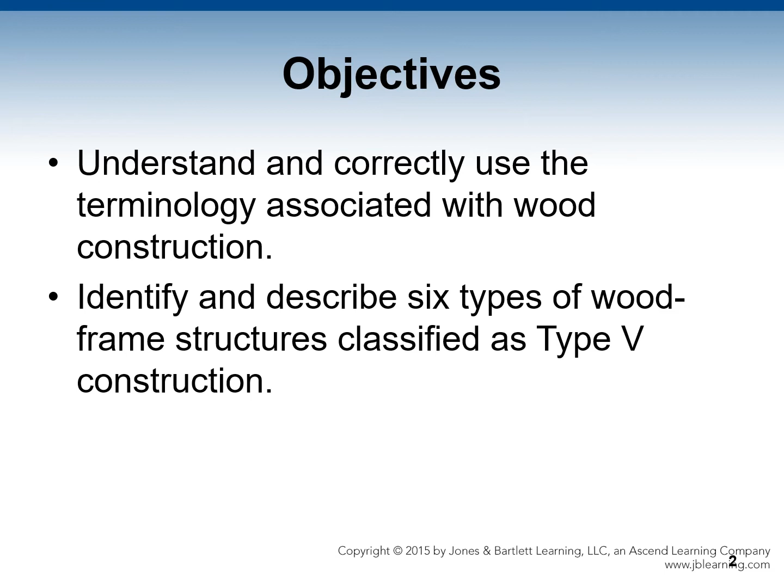The objectives we're going to cover in this chapter are: we will understand and correctly use the terminology associated with wood construction, identify and describe 6 types of wood frame structures classified as Type 5 construction. We will also identify and describe the specific fire protection differences between balloon frame and platform frame construction, and describe the construction of platform frame buildings. Finally, we will understand how a truss is constructed and how it performs from a fire protection perspective, and explain the difference between fire stopping and draft stopping.

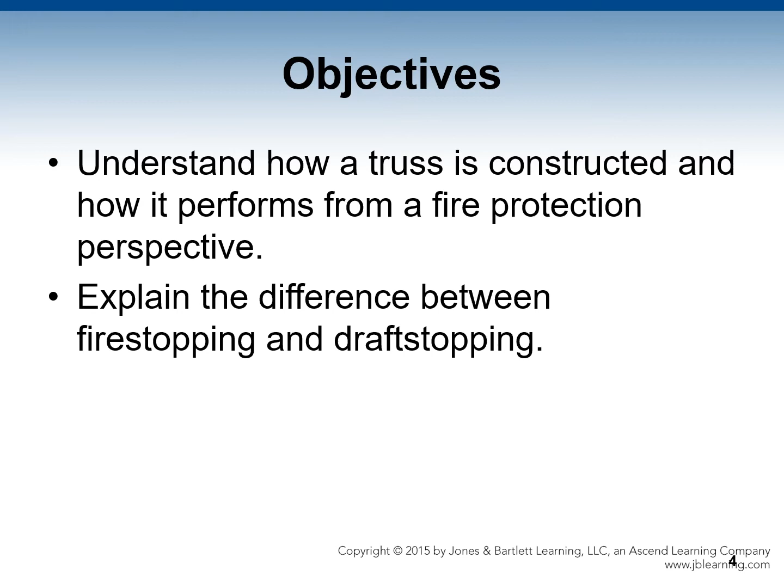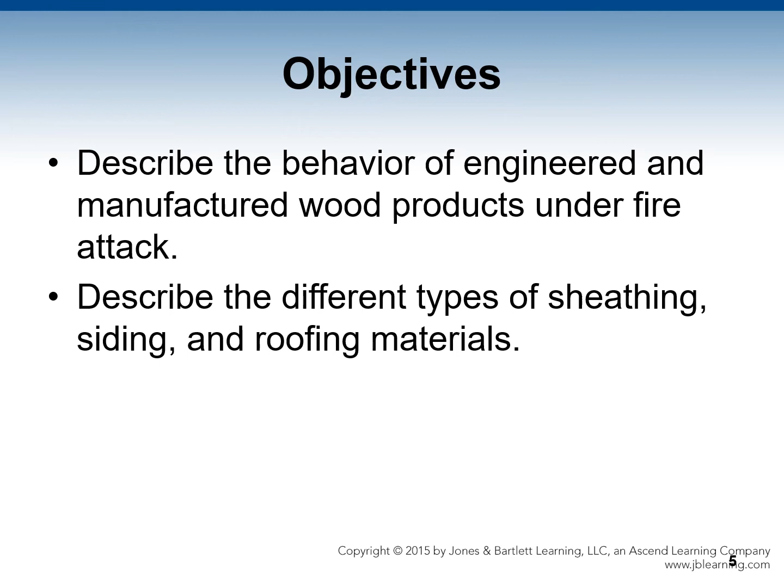We will also describe the behavior of engineered and manufactured wood products under fire attack, as well as describe the different types of sheathing, siding, and roofing materials.

Most fires are fought on, in, or under wood. Wood is combustible, of course. Wood construction creates a combustible void, and wood can have a very rapid flame spread.

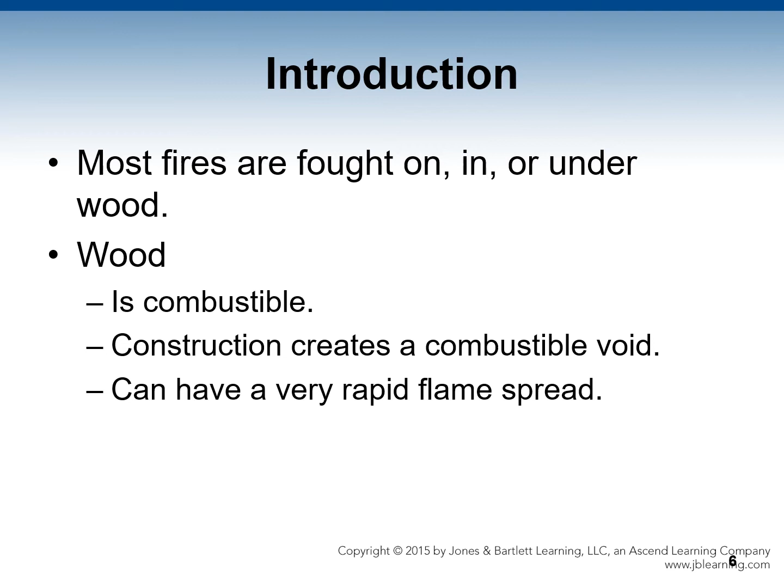Wall bearing means it's a structure where the entire structural load is carried on the walls. A wood walled building means a wall bearing building that carries the load of the structure and contents. An example of that would be a log cabin, for instance.

Let's talk about some terminology. This is wood frame terminology, and the first is a chamfer, which is to cut off the corners of timber to retard ignition. End match lumber is with tongues and grooves at the end.

Engineered wood typically refers to laminated timbers, or wood modified from its natural state. In other words, wood that's been bent into a curve, for instance. Glued or laminated timbers are planks glued together to form a solid timber.

Heavy timber is lumber that is 8 inches or more in its smallest dimension. Joists are floor beams. Legacy construction is the use of solid wood members as opposed to lightweight wood trusses and wooden joists or wooden I-joists.

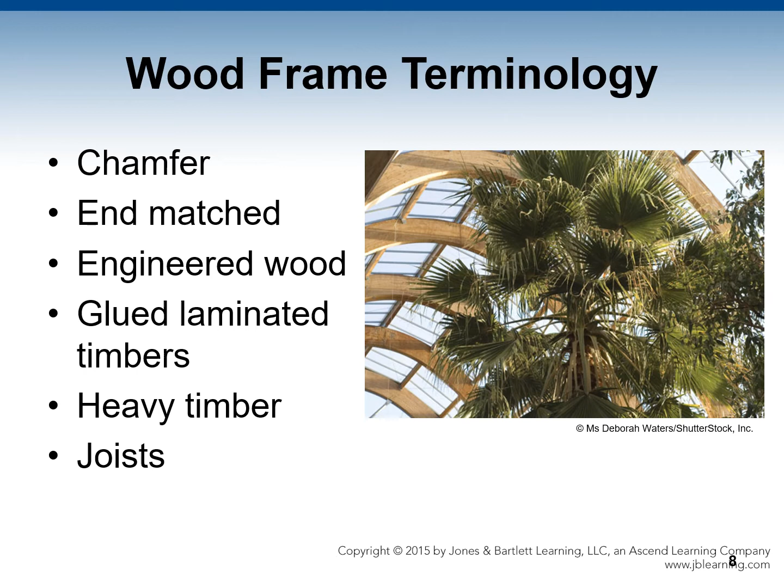Some more terminology. Lumber is wood that has been sawed and planed. Matched lumber is tongue and groove lumber, usually lengthwise, like you would find in an older wood floor where it's tongued and grooved.

Oriented strand board, or OSB, is made of layers of strands of wood cut from logs with a fairly constant width to length ratio. Plywood is layers of wood veneer laid in different directions, glued together under pressure.

Rough lumber is lumber that is left as sawn on all 4 sides. Splines are wooden strips that are fit into grooves in 2 adjacent planks to make a tight floor. Studs are columns in frame buildings.

Wood is the hard fibrous material forming the major parts of trees, of course, and wood lath is the narrow, rough strips of wood nailed to studs. An example of that is what you see here in this picture.

That's wood lath construction. The white stuff you see coming through is called French plaster, and that's on the other side. What you're seeing is wood lath construction with the plaster oozed through the planks that are nailed to the studs.

This is very common in houses from pre-World War II and a few right after World War II, but there are an awful lot of houses that were built during that age and before.

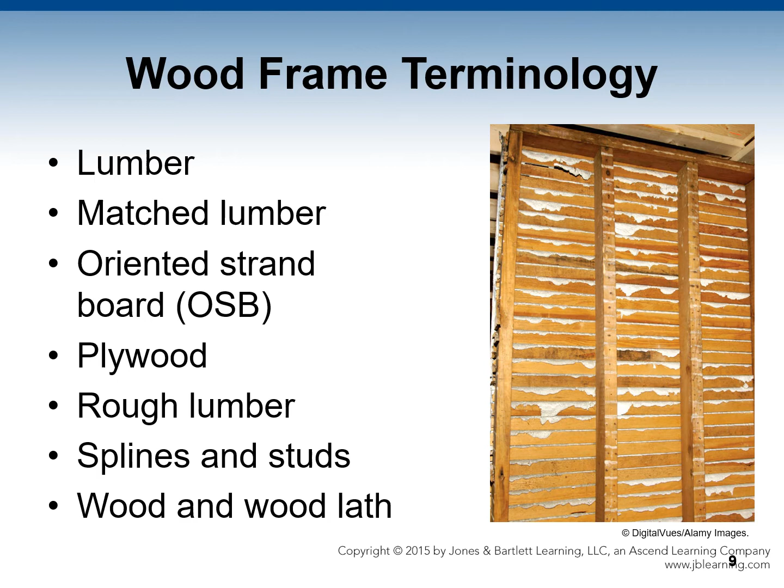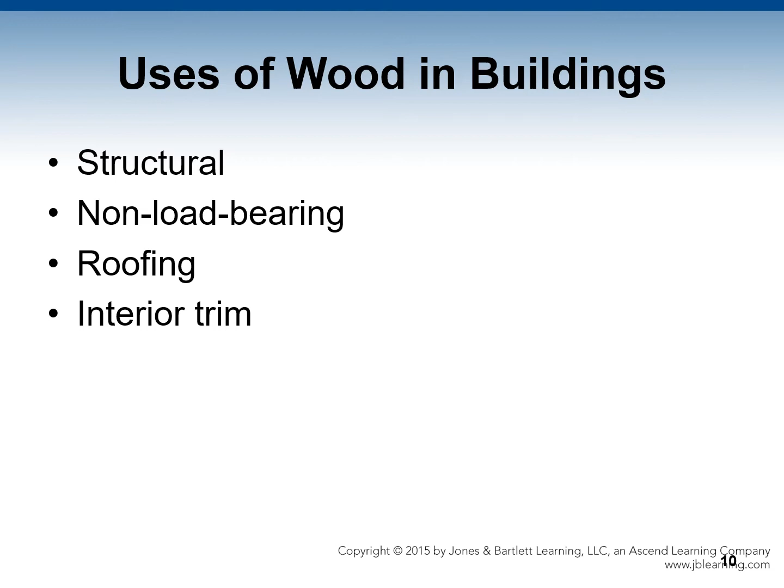Uses of wood buildings: there are a lot of them, and many of them are structural, carrying the building loads. Non-bearing wood, which is wood lath for carrying plaster, or wood wainscoting like the picture you saw in the previous slide, is used for roofing and also interior trim.

Let's talk about types of wood frame buildings. We have log cabin, post and frame, balloon frame, which is sometimes called Eastern framing, platform frame, which is sometimes called Western framing, plank and beam, and truss frame.

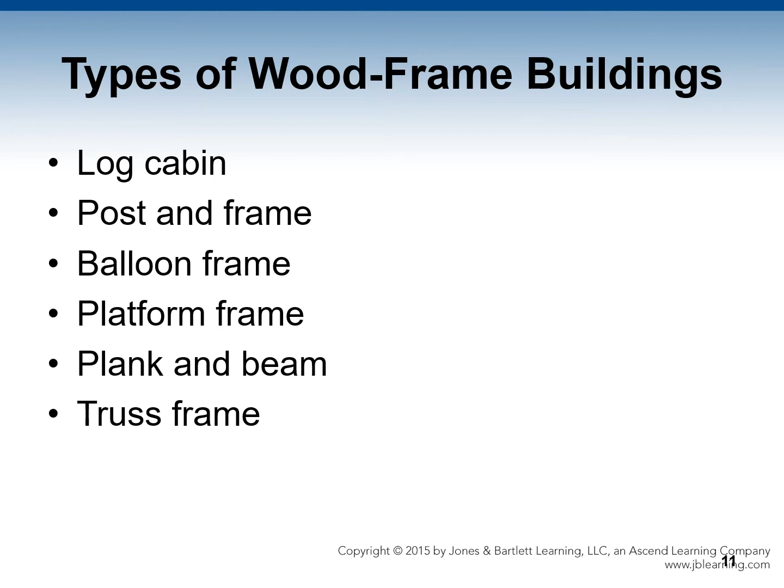Let's talk about log cabins first. These are constructed of entire tree trunks as opposed to boards sawn from trees. Many older buildings, even multi-story buildings, are concealed log cabins. Many carry unexpectedly heavy loads, and they are coming back into fashion. Interior surfaces of log cabins might be boards or plywood, although sometimes they're left unfinished.

Now let's talk about post and frame. This has an identifiable frame or skeleton of timber fitted together, with mortise and tenon, socket and tongue construction, fitted together to transfer loads. And then let's talk about trunnels - this is a New England term for a tree nail.

Post and frame buildings are framed buildings, and the walls are not structural or load-bearing. It's a deceptive imitation of post and frame. Balloon frame houses are a deceptive kind of imitation post and frame, built with exterior finish to resemble post and frame construction. They're also called English Tudor style homes.

Other types of construction are decorated to resemble post and frame style. Now you have to bear in mind, in the western United States here where we're studying, we really don't see this kind of construction, but back east there is a tremendous amount of this kind of construction. So bear in mind, if you move back east, you're likely to encounter this.

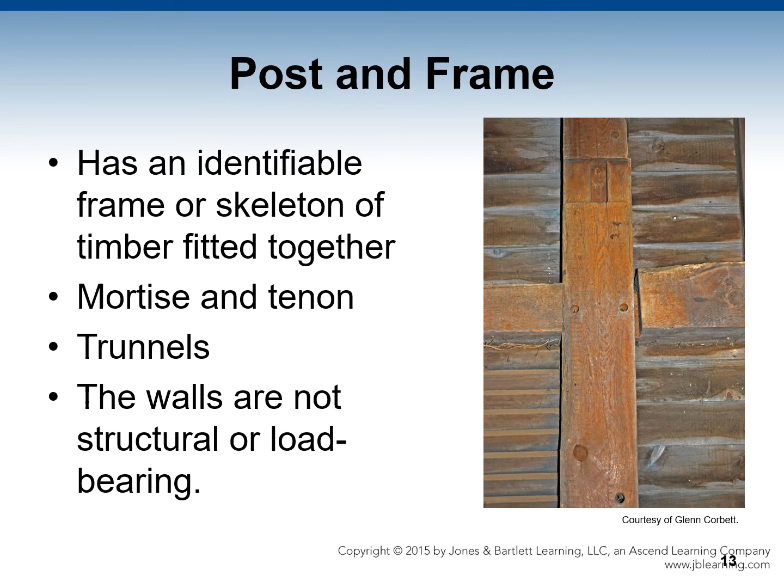Now let's talk about balloon frame. The background of this is its walls of ordinary studs nailed together, an almost universal construction method for multi-story wooden buildings until the middle of the 20th century. The fire danger is that fire can spread through all interconnected spaces from cellar to attic and across the ceiling. Interconnected voids can be considered to be one big balloon.

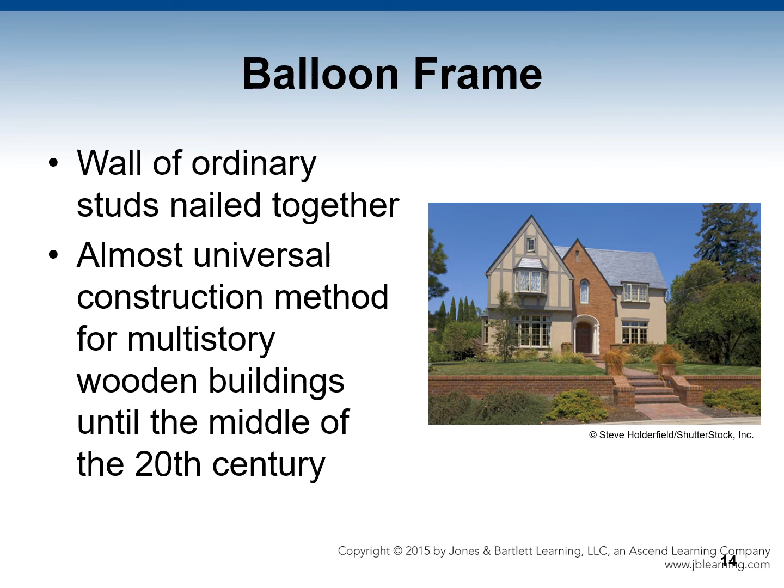Installing fire stopping in an old building is very costly, so most houses don't have it. Unfortunately, balloon frame is coming back into style, so this is something you definitely need to be aware of also.

Let's talk about fires in balloon frame buildings. Fire found in the walls can quickly cross the building through joist channels. Use of a plumbing torch to braze a copper tube or thaw out a pipe can often be a culprit.

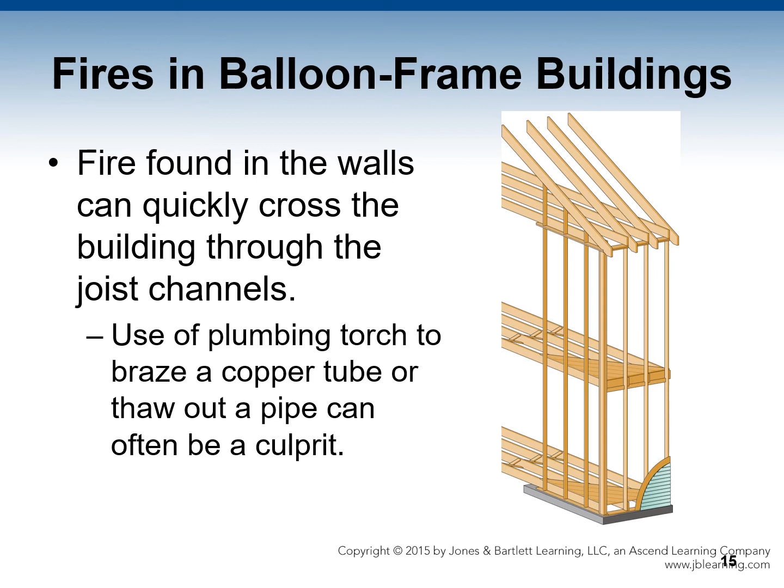The basement is usually the worst place for a fire to start. Firefighters need to anticipate the spread. Extension sector is an officer whose function is to observe the building on all sides, watching for signs of fire spread. Vermiculite is a sand-like material that acts as a fire stop that has been added to some buildings that are balloon frame construction.

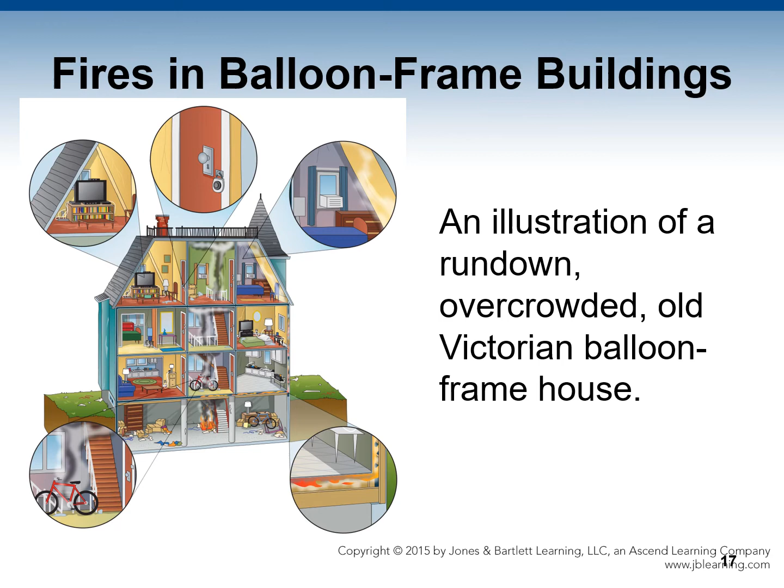This is an example of fires in a balloon frame building. It's an illustration of how a rundown, overcrowded, old Victorian balloon frame style house will literally go up like a box of matches.

Let's talk about platform frame. This is defined where the first floor is built as a platform. The subflooring is laid on the joists, and the frame for the first floor walls is erected on the first floor. There's no continuity from top to bottom.

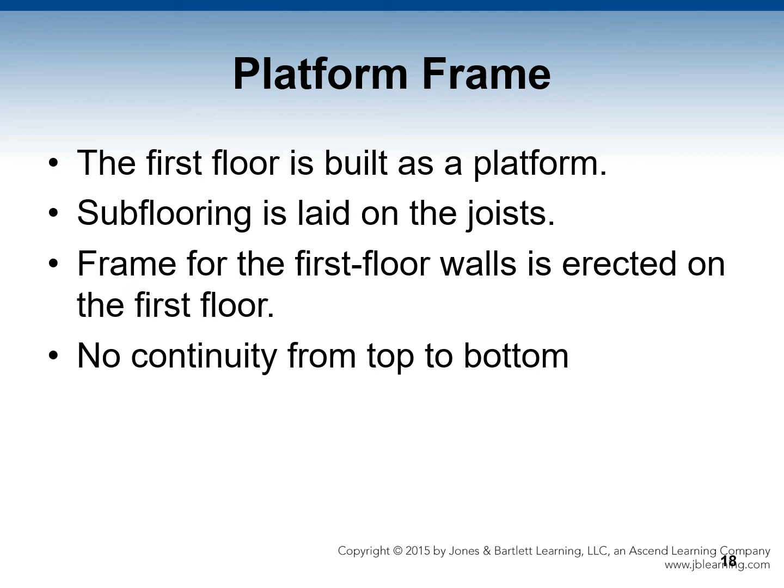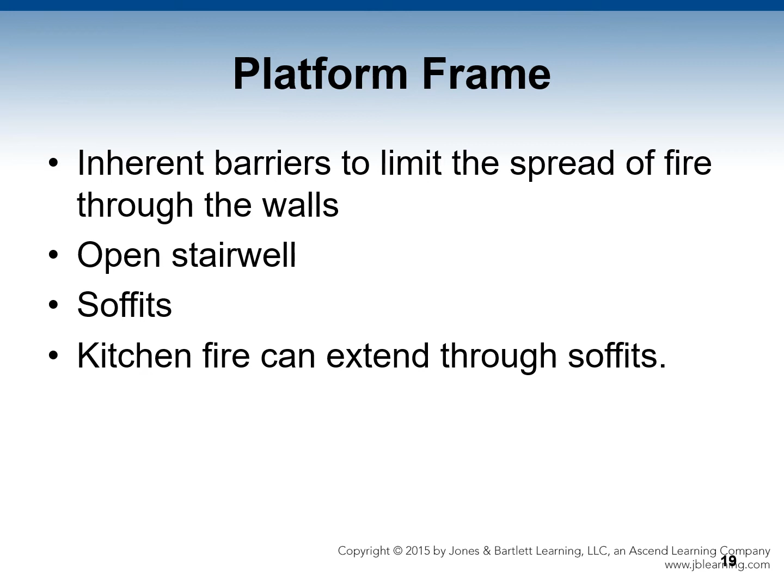In a platform frame house, there are inherent barriers to limit the spread of fire through the walls. An open stairwell is the quickest way for smoke and heat to rise to the top of the home. Soffits are false spaces above built-in cabinets that provide a connection, generally without a fire stop, between walls and joist spaces. A kitchen fire can easily spread through soffits.

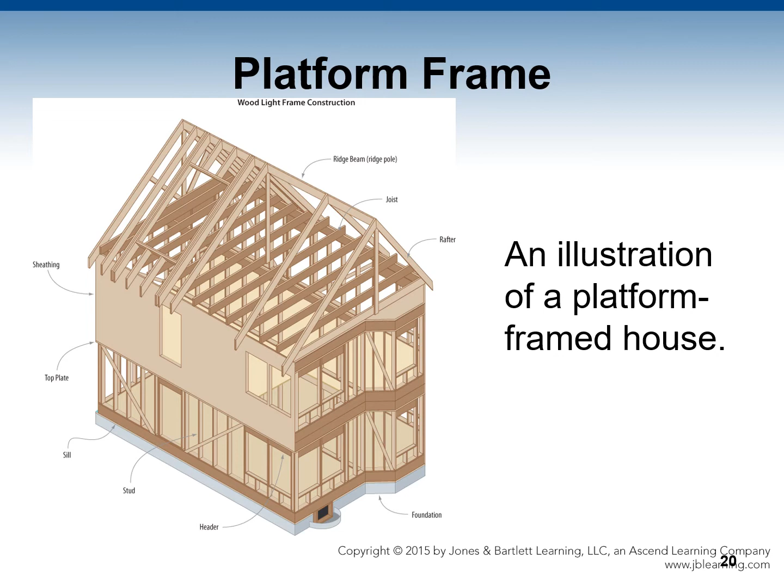Now let's talk about construction of a platform frame building. It consists of rough carpentry that includes all of the wood framing members and sheathing of a building. A sill is found on the platform of the frame of a wood structure. Subflooring is laid on top of the joists, and it serves as the base for the finished floor. Bridging or cross bracing helps share the loading placed on the floor.

The header or bond course is the bricks laid so that the end is visible. A trimmer is a piece of lumber that supports a header and can be found in floor openings such as stairwells, and they run parallel to floor joists.

Continuing with platform frame building, the bottom plate is laid on the subfloor where the vertical studs are installed. Top plate is the top horizontal member of a wood frame wall that supports the ceiling joist. Rafters are wood members used to support the roof sheathing and loads. Ridge boards are placed on the ridge of the roof onto which the upper ends of the rafters are fastened.

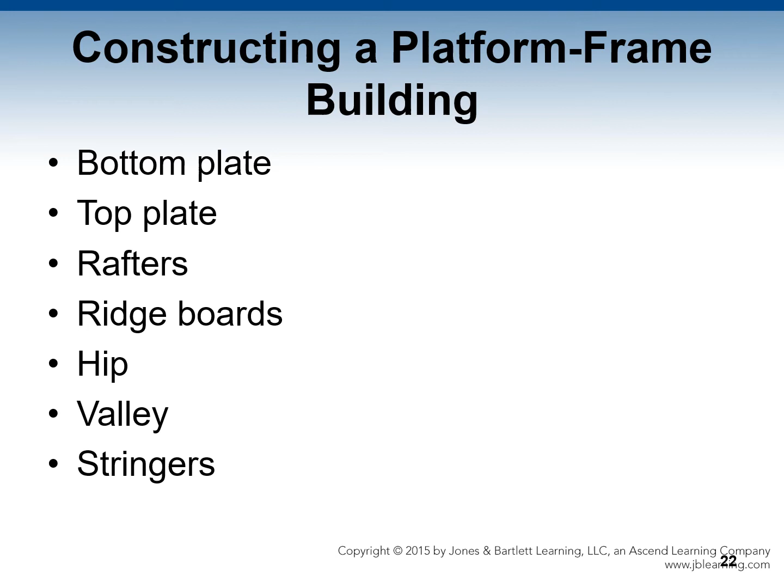Hip is the rafter at the angle where two sloping roofs or sides of a roof meet. The valley is the lower slope formed by the connection of two inclined planes of a roof. Stringers are a component of a set of stairs used to support risers and treads.

Now let's discuss plank and beam construction. This is used in modern construction. It's built with heavier beams spaced much farther apart than the traditional 16 inches. They consist of thick, finished tongue and groove planks used for flooring, and this helps reduce the volume of concealed space in which fire can burn, shielded from hose streams.

The interior finishes often have high flame spread and smoke developing characteristics. In many cases, rooms are all one large open area, like the great room, kitchen, and dining room - there are no separate walls for them. They're just one large area.

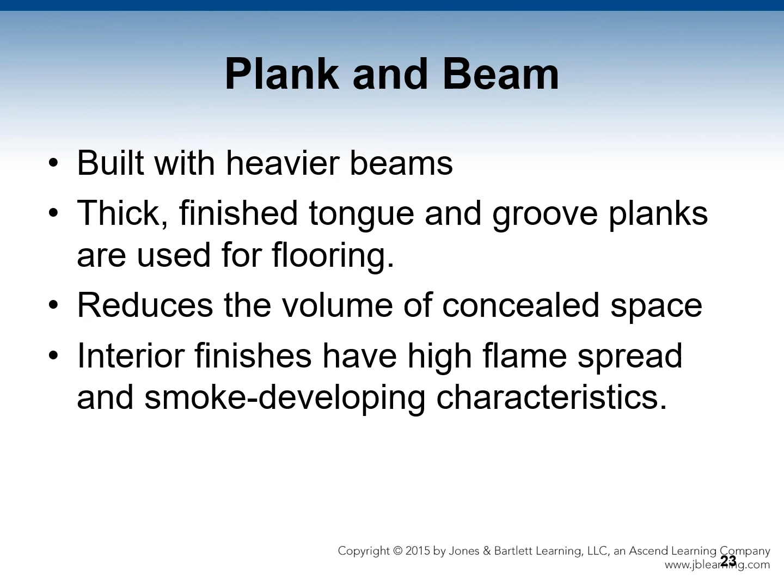Continuing with plank and beam: fire in high open spaces can spread rapidly and develop into a huge volume. Intermediate structures should be sprinklered or of non-combustible construction. Unfortunately, they aren't all built that way.

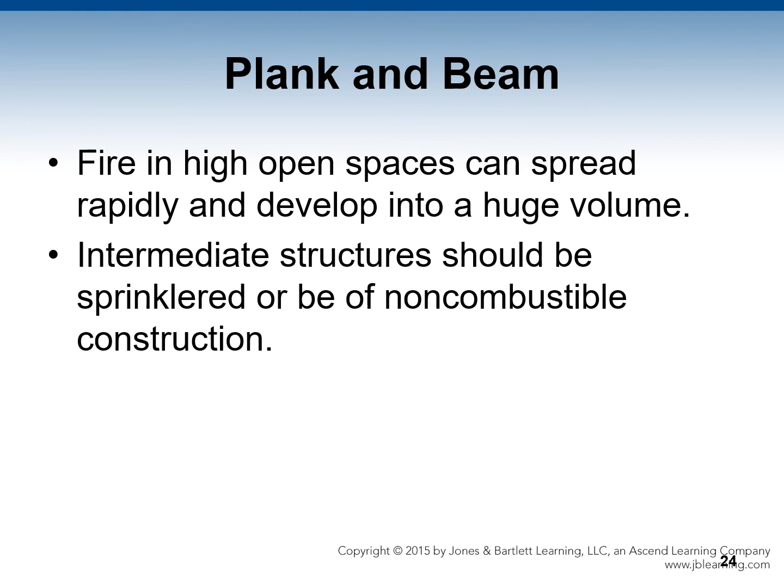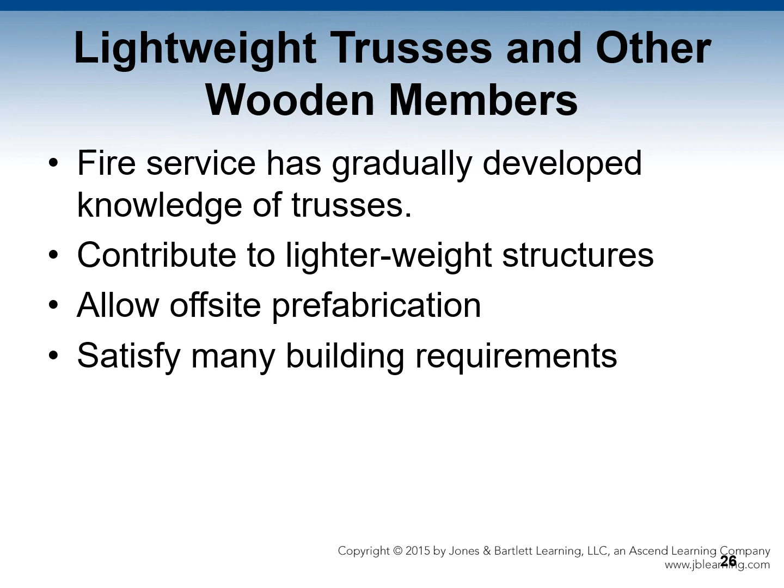Now let's talk about lightweight trusses and other wooden members in construction. Knowledge has developed gradually in the fire service regarding these. They contribute to lighter weight structures, allow off-site prefabrication, and satisfy many building requirements.

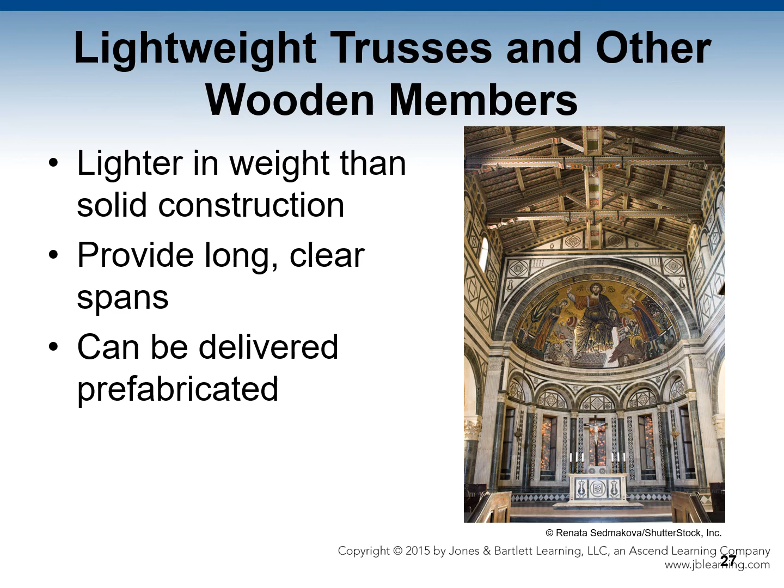They are lighter in weight than solid construction. They provide long, clear spans and can be delivered prefabricated. Lightweight wood trusses have been in general use since the 1960s and are joined together with steel gusset plates called gang nails.

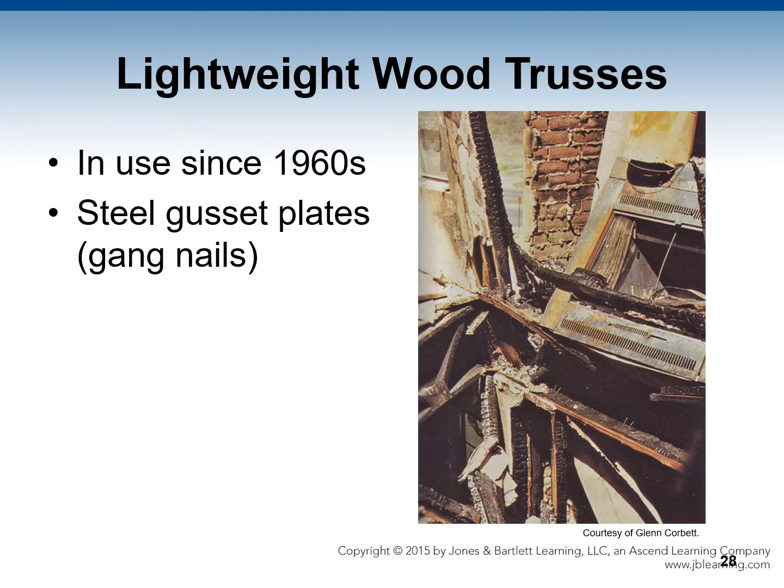Finger joints are interlocking wood pieces glued together to create a longer piece of dimensional lumber. This is used when you can't find, for example, a 30-foot piece of lumber for a truss - you'll see this type of construction to create a longer piece of dimensional lumber when a single piece isn't available.

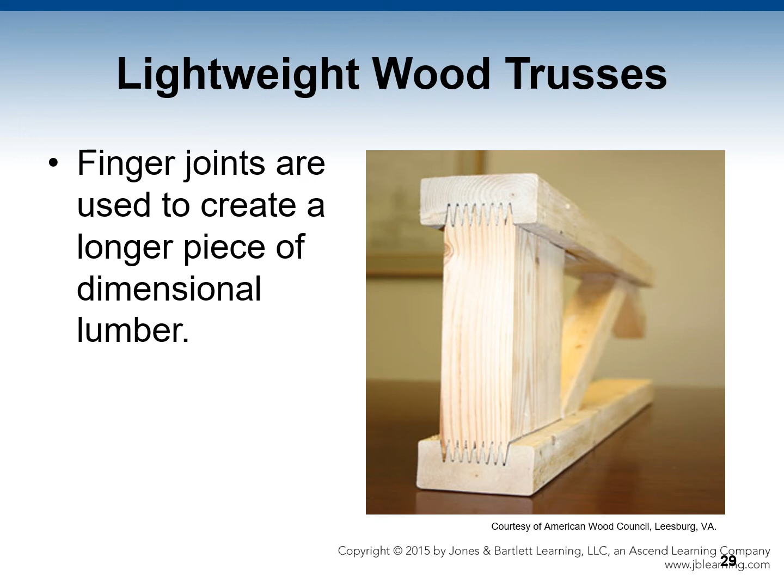The dangers of wood truss floors: these are a hazard to firefighters. They have a high surface to mass ratio, and heating of the gusset plate will decompose tensioned wood fibers holding the teeth. There are no outward indications of truss building presence, and it may be disclosed by smoke or fire pushing through the wall or the floor line.

Some more dangers of lightweight wood trusses - you can see here in the picture where they're placing one into place. They're equally hazardous as wood truss floors. They lack a single ridge pole to help support a firefighting roof ladder. Exposed roofs can fall over in a windstorm. Ventilation must be done with an aerial device, and you can expect a roof collapse during a fire in a roof made of this type of construction.

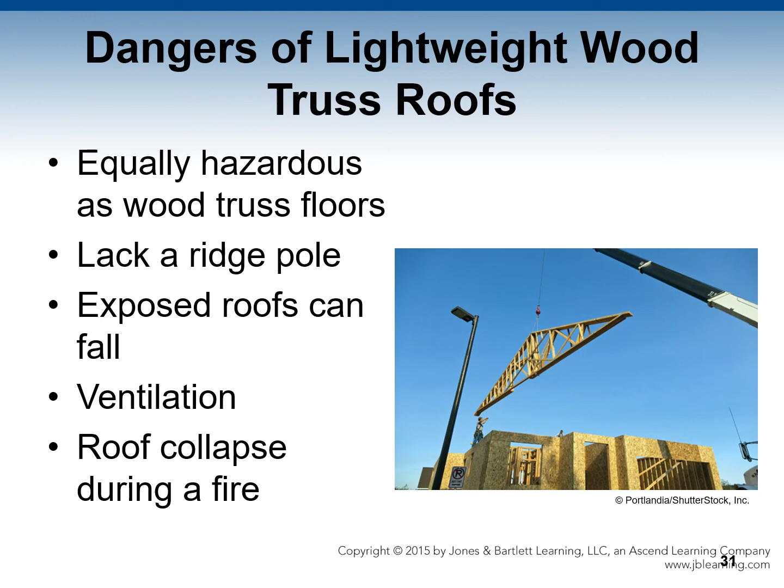Now let's talk about the truss void. This is found within a truss roof system, and this void space is between the top floor of the ceiling and the roof. It represents a large area in which explosive carbon monoxide can accumulate. Voids are interconnected horizontally and vertically.

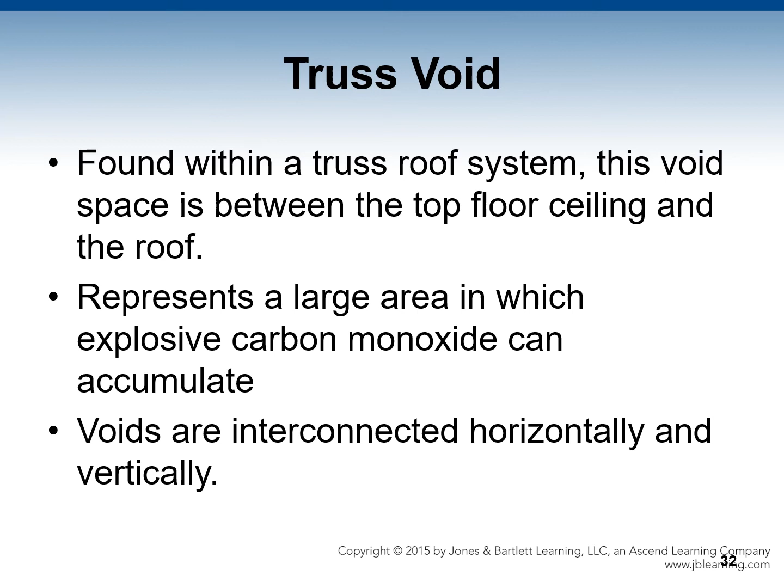The National Fire Protection Association NFPA Fire Protection Handbook provides information on carbon monoxide. A rule of thumb: any exposure in which the product of concentration in parts per million times duration in minutes equals 33,000 means that it's likely to be dangerous. The flammability range of carbon monoxide is from 12.5 all the way up to 74% - it's a pretty high concentration.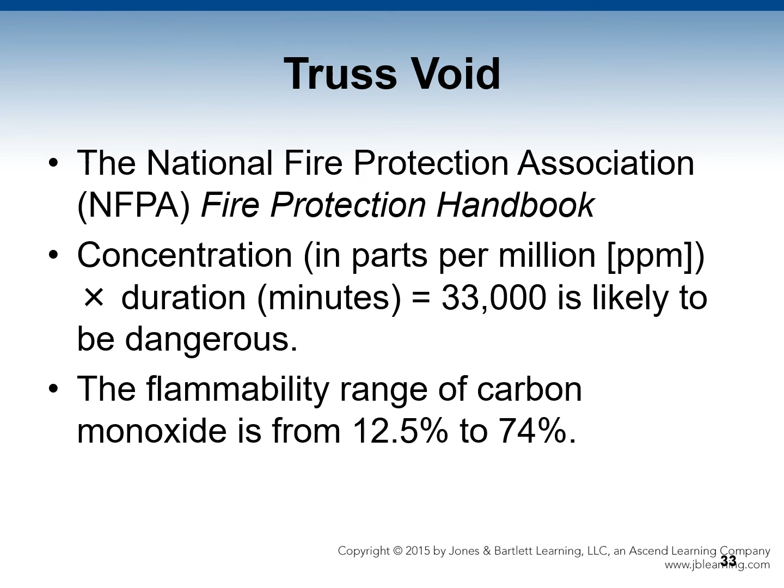Catastrophe potential: you have the possibility of lateral expansion because trusses support the balcony that is the only exit for occupants and the only access point for the fire department.

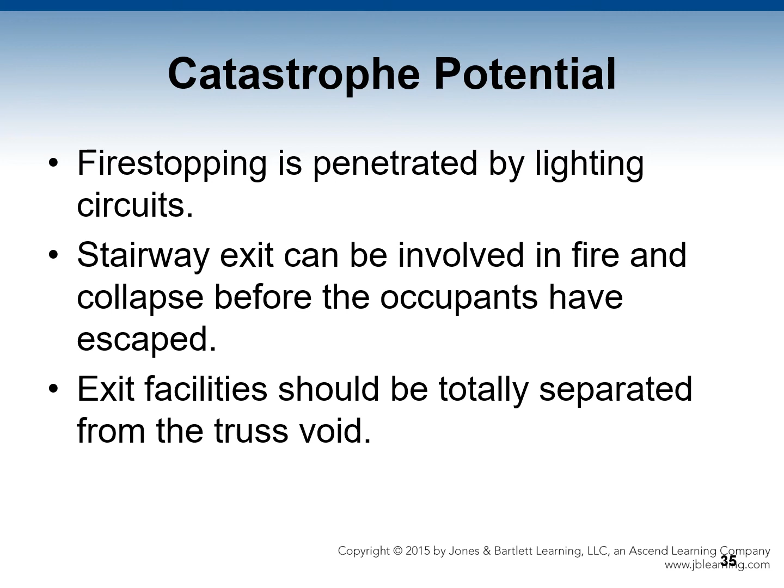Fire stopping is penetrated by lighting circuits. Stairway exits can be involved in fire and collapse before occupants have escaped, and exit facilities should be totally separated from the truss void itself. Unfortunately, contractors don't always build them this way.

Now let's talk about automatic sprinklers and truss voids. NFPA 13R is the standard for the installation of sprinkler systems in low-rise residential occupancies. It's intended to prevent flashovers and save lives. Partial systems should not be expected to provide the fire suppression or control that a full sprinkler system would have provided - so some houses only have partial sprinkler systems. Fires in relatively new 13R protected condos and older 13R sprinkler dwellings have those types of limited systems.

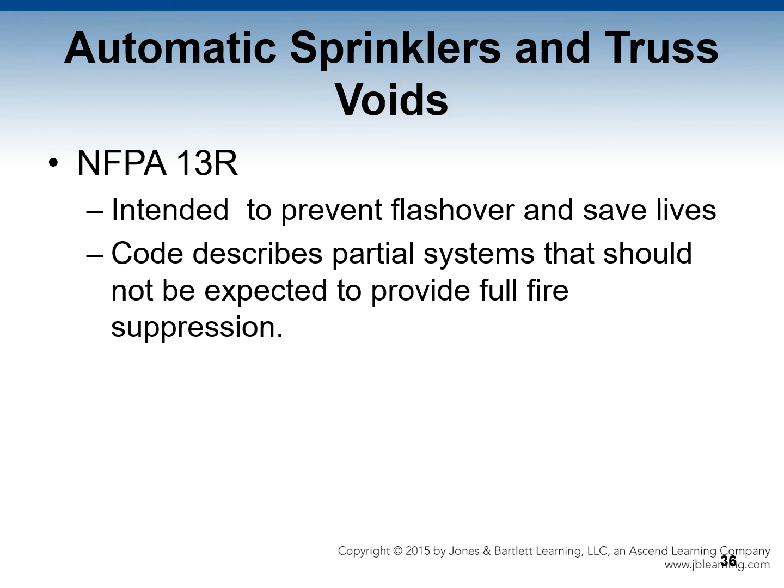Now let's talk about lightweight wooden I-beams. This is a wooden beam - it's inefficient in terms of weight and cost. A sawn beam is replaced by wooden I-beams. A steel I-beam can be used, and steel is extruded through a die. The top flange and bottom flange are wide to cope with compressive and tensile loads.

Then you have sawed wooden beams, and these can be thought of as containing an I-beam with surplus wood along the sides. Firefighters stand and operate on the surplus wood on a burning structure. Gradual sagging is a warning of impending collapse.

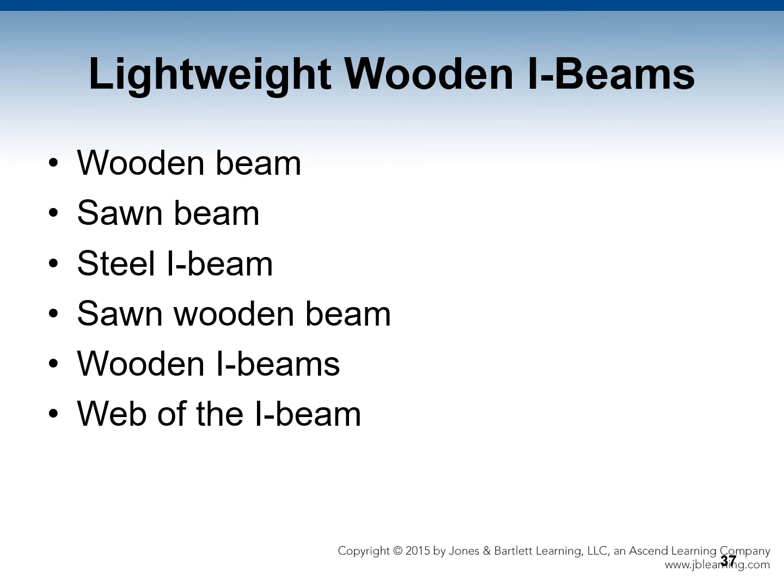With wooden I-beams, they consist of a solid or laminated 2x4 for the top and bottom chords, the OSB or plywood web between the chords. The web of the I-beam is often penetrated by utilities and is an early failure point in fires. Wooden I-joists can be considered the most dangerous of all structural members to firefighters today.

Now let's talk about the truss frame. The roof and floor trusses and studs are tied into a unitized frame. The small dimension lumber will burn faster than larger solid lumber, and unsupported spans in truss structures are subject to total collapse.

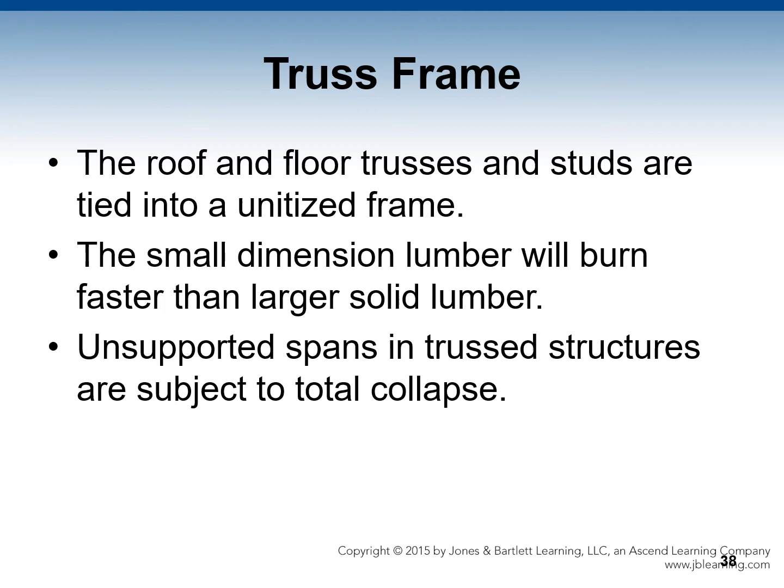The loss of a stud due to a fire could precipitate the collapse of the integral roof or floor truss. Truss frame structures are planar structural components. Design assumes that every truss member will remain in its designed position under load, which without fire, it certainly does. But with fire, all bets are off.

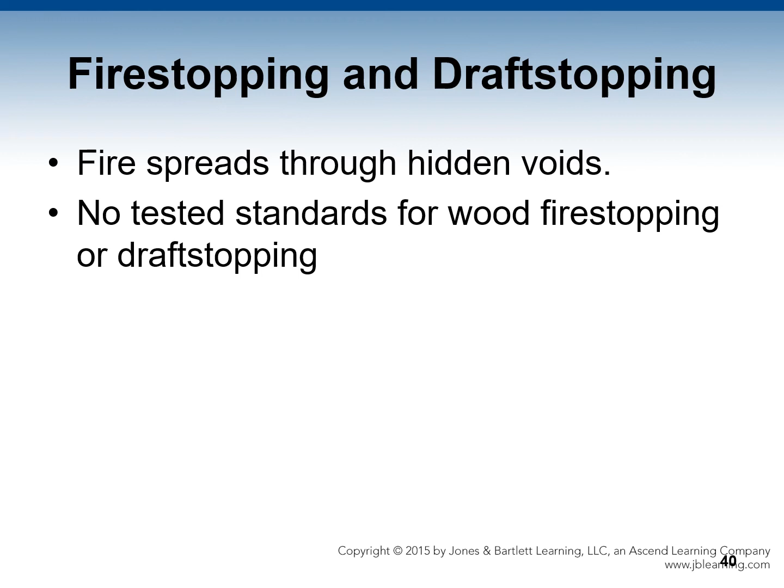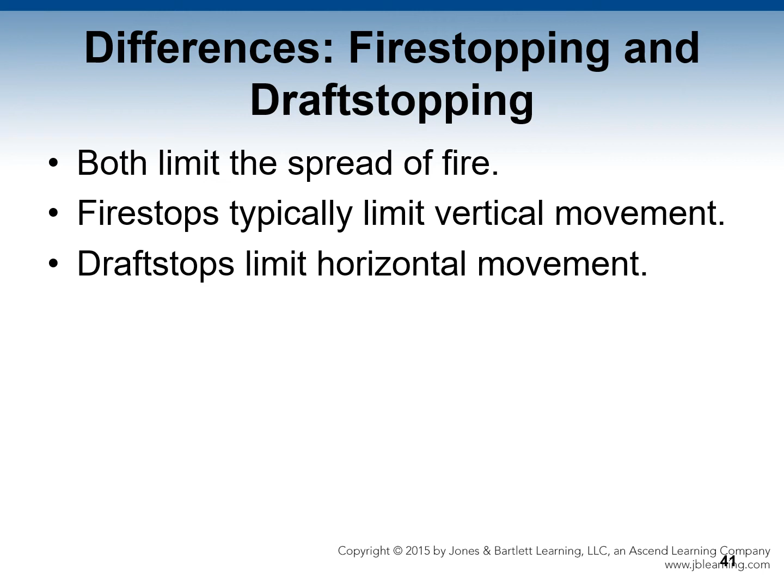Let's talk about fire stopping and draft stopping. Some problems: fire spreads through hidden voids, and there are no tested standards for wood fire stopping or draft stopping. The difference between fire stopping and draft stopping means that both limit the spread of fire. Fire stops typically limit vertical movement, and draft stops limit horizontal movement.

Continuing with types of fire stopping, inherent fire stopping comes as a result of the normal building construction that's incidental to necessary structural purposes. Legal fire stopping is to meet the requirements of a code.

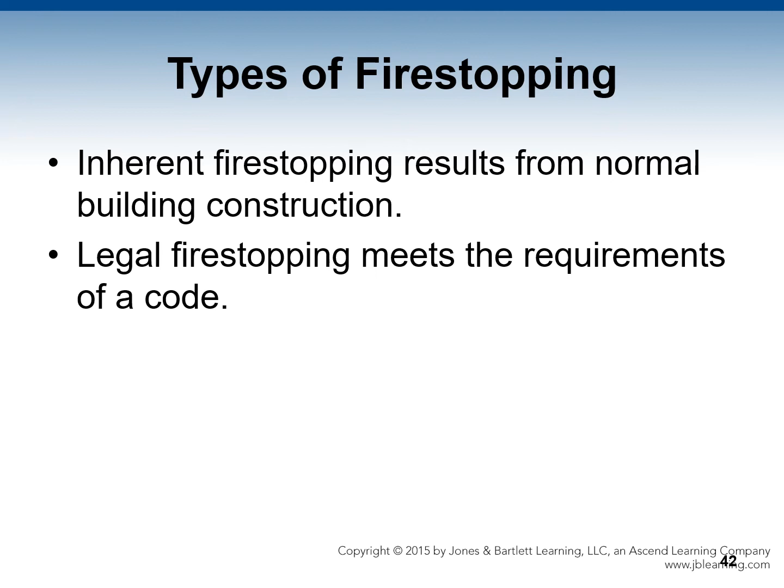The effectiveness of fire stopping: the lack of fire stopping in one stud channel is sufficient to transmit fire. In older houses, all four sides of the chimney-like stud channels are combustible. A lack of fire stopping is particularly critical in balloon frame buildings. In fact, it's critical in balloon frame buildings.

Not all building inspectors are familiar with the basic gas law. If the temperature rises and the volume remains the same, the pressure rises.

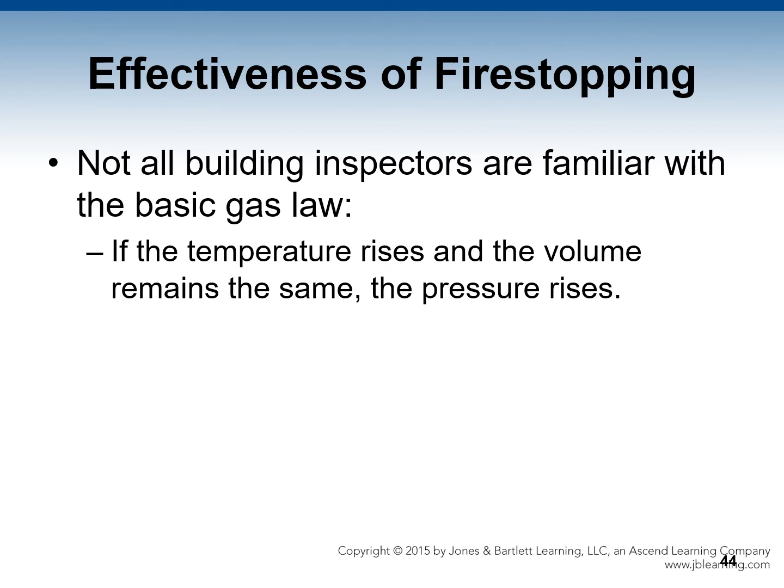Now let's talk about the cutoff ends of joists. This can be used as fire stopping and there's no seal because the wood cutout creates a space.

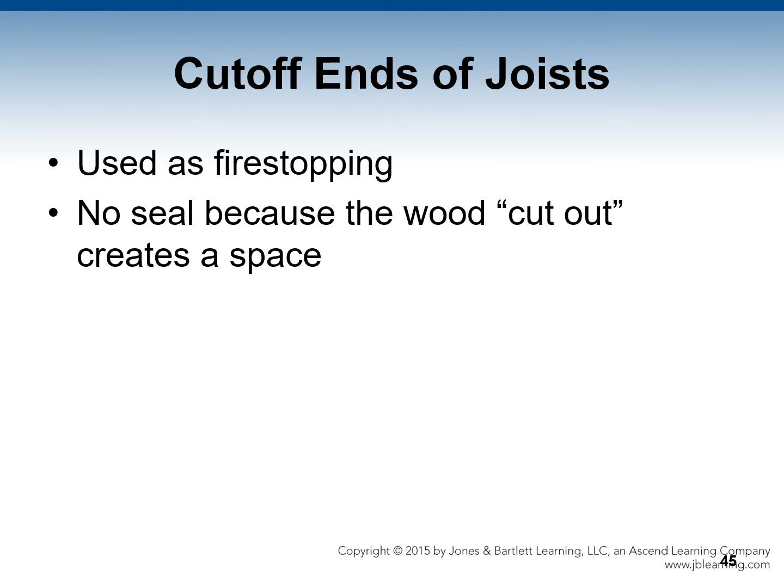Now let's talk about the difference between West Coast and East Coast construction, and I mentioned this briefly earlier. There are uniformly unsatisfactory practices. A sheet of gypsum board is buttered into place. Then thin plywood or flake board can be poorly fitted. And in older homes on the East Coast, you have construction that literally goes back to when we were still part of the British Empire.

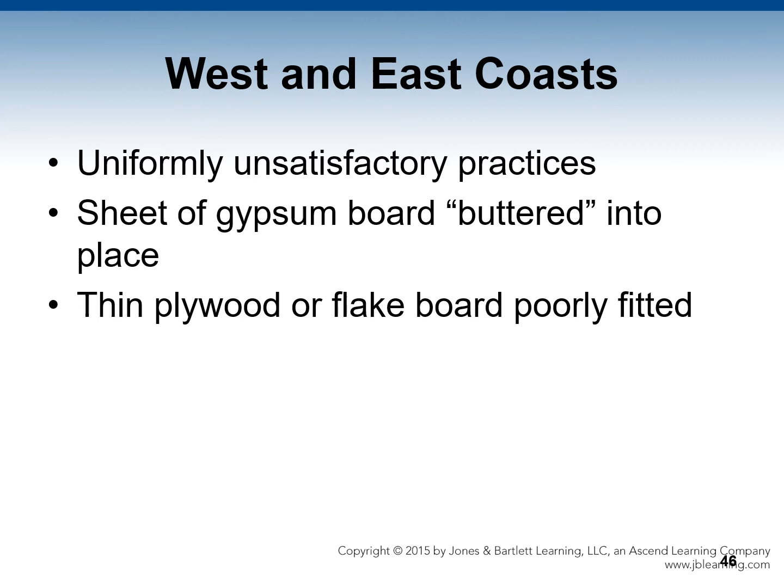So firefighters in the East Coast face literally every type of home construction, whereas out west we have construction that's limited to about the last 135 years or so, roughly. So there's one big difference.

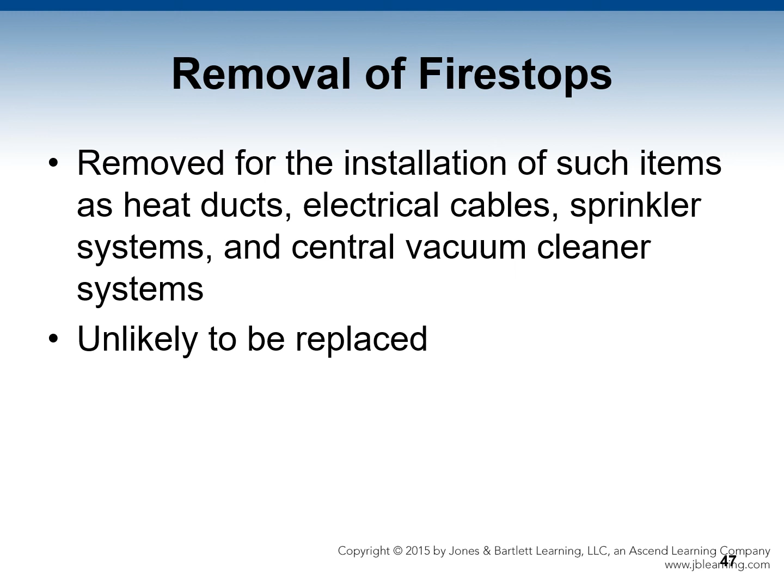Now let's talk about removal of fire stops. These can be removed for the installation of such items as heat ducts, electrical cables, sprinkler systems, and central vacuum cleaner systems, but are unlikely to be replaced.

Protecting wood from ignition. Some sobering news: most fires are fought by firefighters standing on, in, or under a combustible structure. Encasing wood in concrete promotes decay.

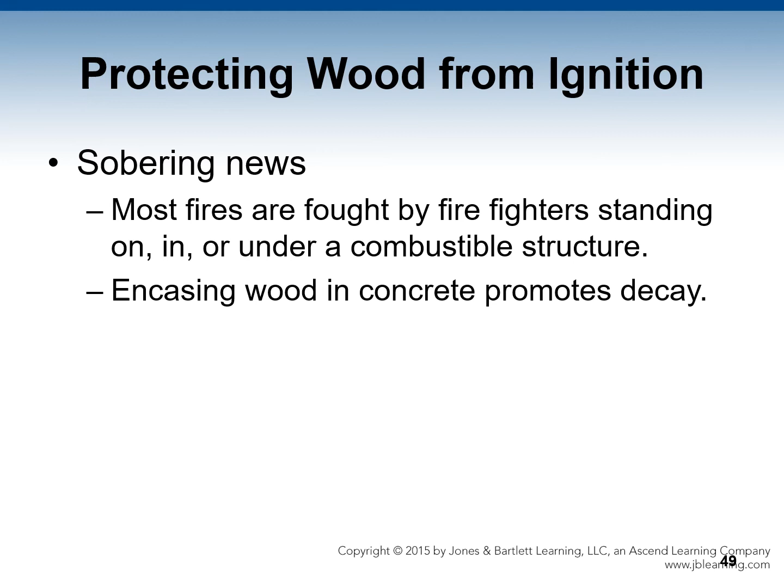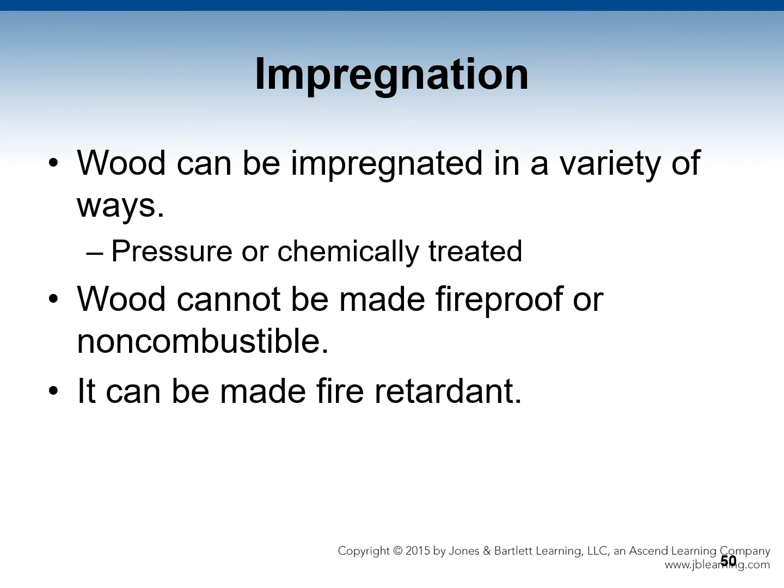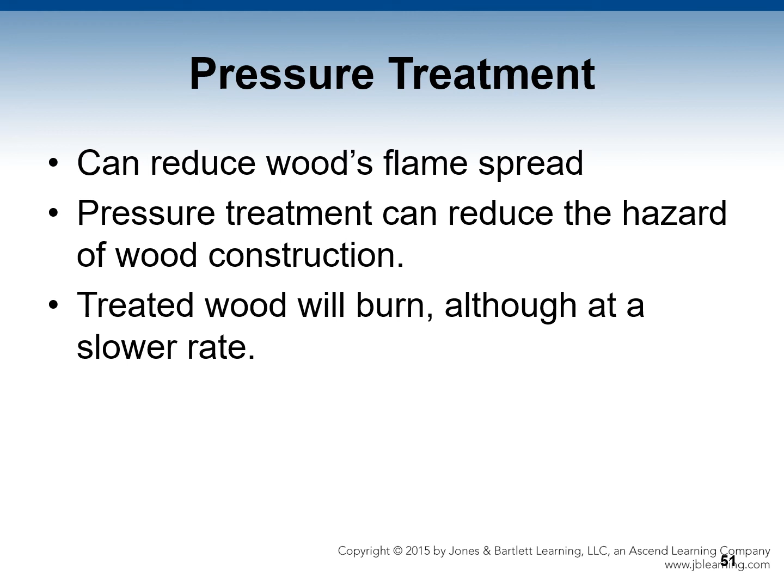Now let's discuss impregnation. Wood can be impregnated with chemicals or via pressure treatments. It can be made fire retardant, not fireproof, but fire retardant. With pressure treatment, it can reduce wood's flame spread. Pressure treatment can reduce the hazard of wood construction, and treated wood will burn, although at a slower rate.

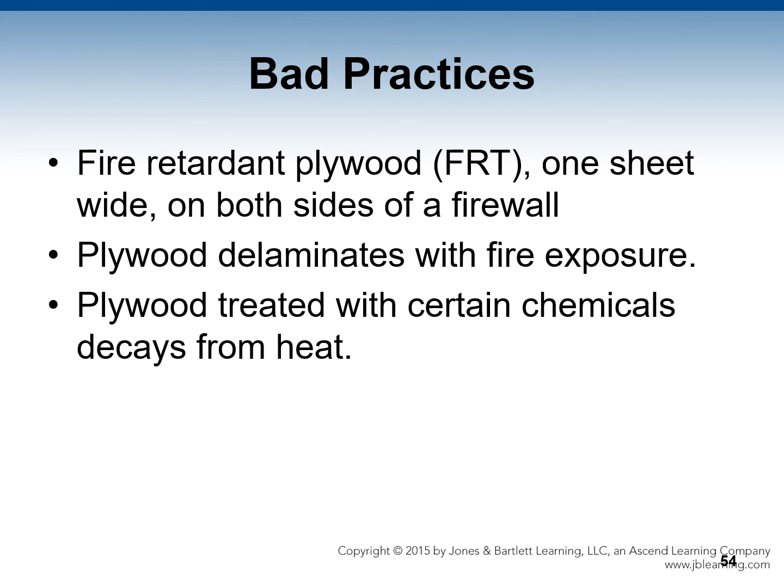Some bad practices: fire retardant, or FRT, plywood, one sheet wide on both sides of firewall. Plywood delaminates with fire exposure, and plywood treated with certain chemicals can decay from heat.

Surface coatings: there's intumescent coating, and it swells up when heated. People will spread it thinner than is recommended, and applying it to an existing installation leaves the unexposed surfaces untreated.

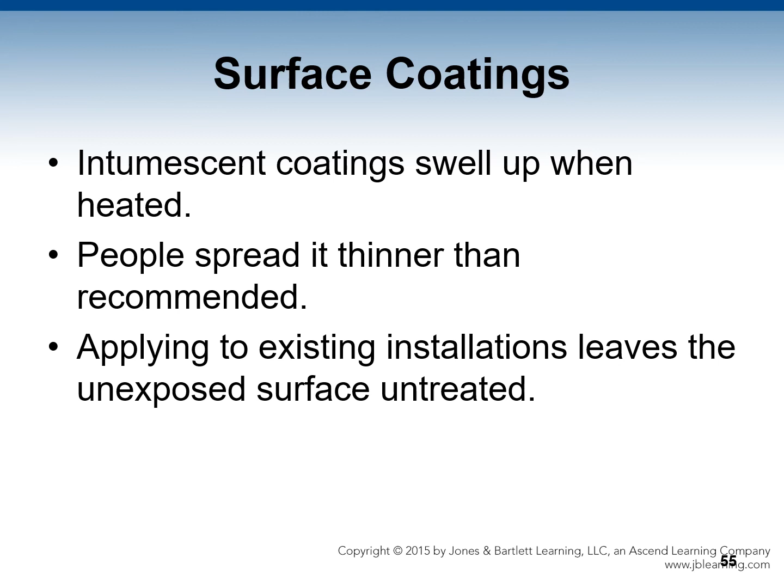Some dangerous treated wood. Treated plywood and lumber have been used for basement walls. It's widely used for exterior structures, but it's still combustible and might cause a collapse, and the fumes are toxic.

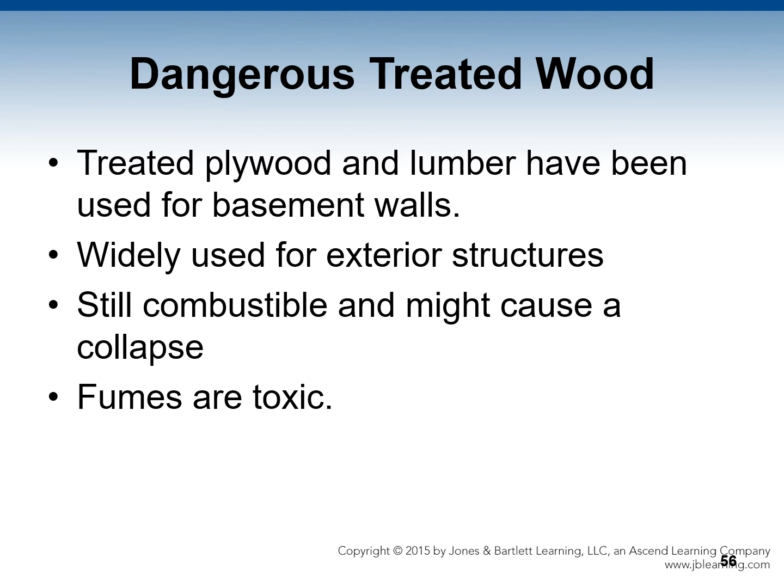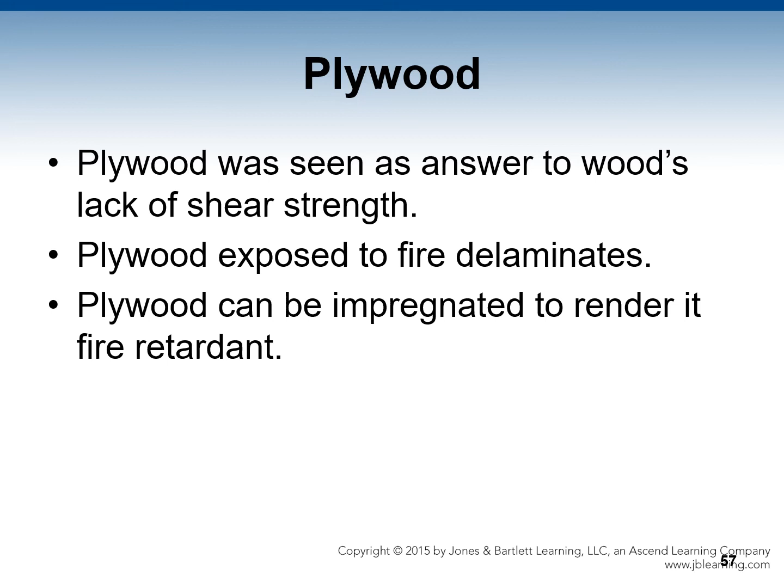Now let's discuss plywood. Wood's lack of shear strength along the grain could be overcome. Plywood was the answer. Plywood exposed to fire delaminates, meaning the layers that are compressed together come apart. Plywood can be impregnated to render it fire retardant and help prevent that from happening, but ultimately, if it gets hot enough, it's still going to happen.

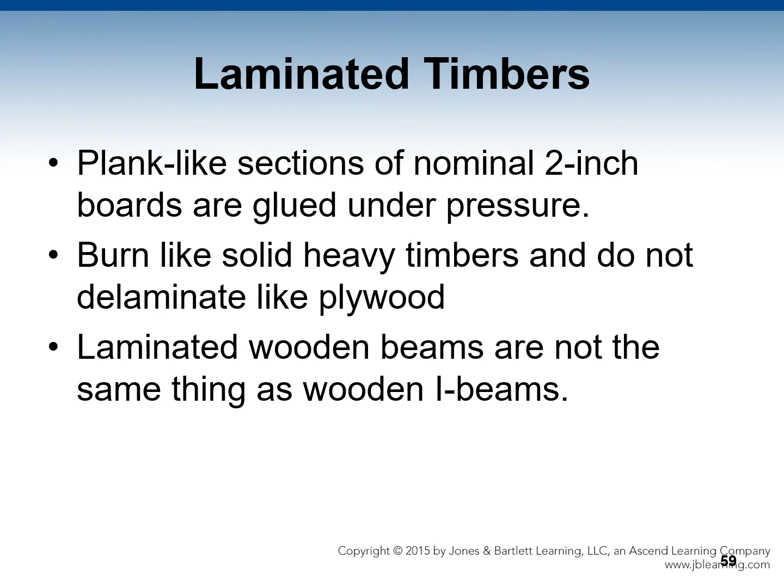Let's talk about laminated timbers. These are plank-like sections of nominal 2-inch boards that are glued together under pressure to produce large arches, beams, girders, and columns. They burn like solid heavy timbers and do not delaminate like plywood does. Laminated wood beams are not the same thing, however, as wooden I-beams.

Now let's discuss paper wrapping. Laminated timbers are shipped in a protective paper wrapper. Paper is hemp reinforced and coated with bituminous moisture repellent. Paper ignites readily and has a high flame spread. So if you're fighting a fire in new construction, this is something you may absolutely encounter.

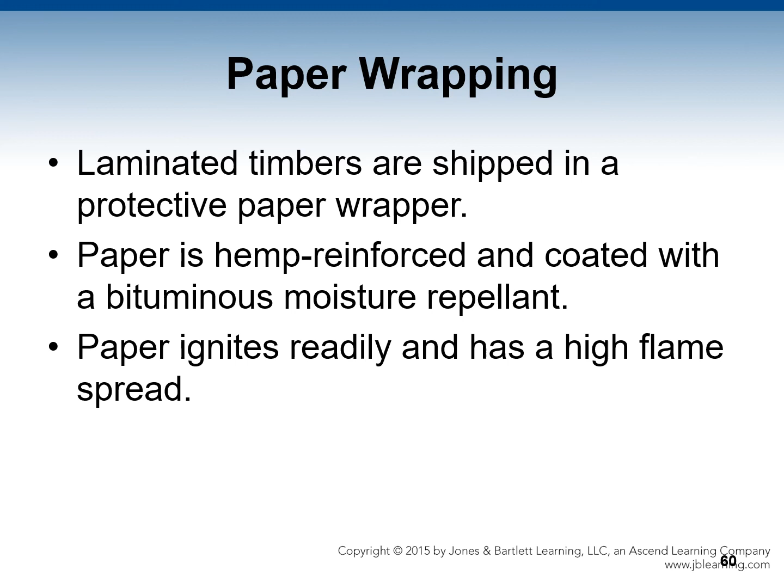Now we'll discuss planks. These are fabricated by gluing 3 boards together with the center board protruding on one side and indented on the other. They may separate during fire, causing boards to fall from the overhead.

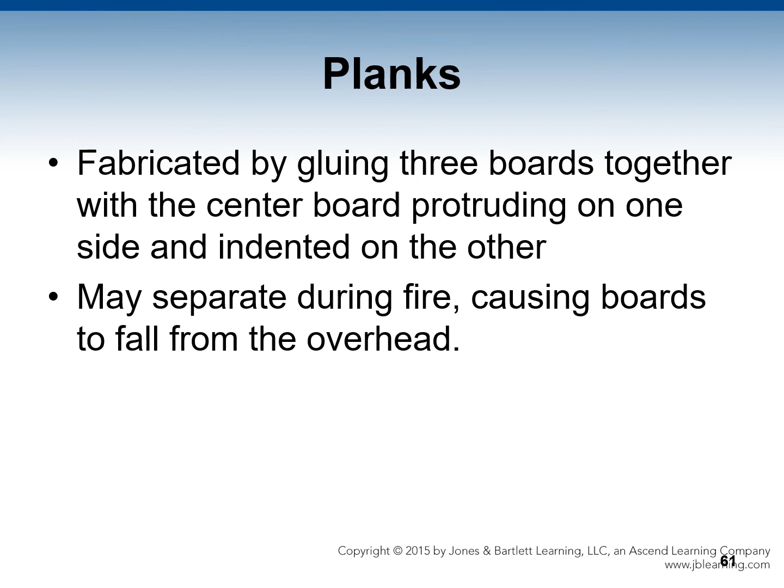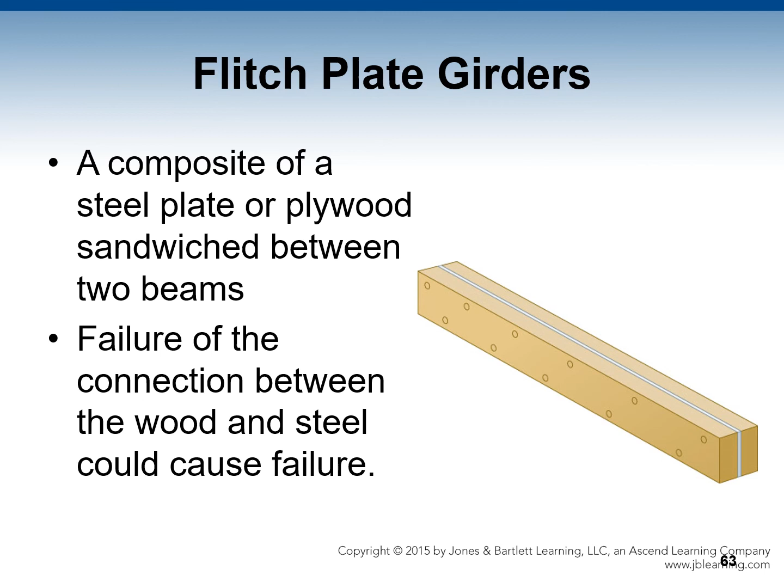Now we'll discuss flitch plate girders. These consist of a composite of a steel plate or plywood sandwiched between 2 beams. The failure of the connection between the wood and steel or burnout of the plywood could certainly cause failure.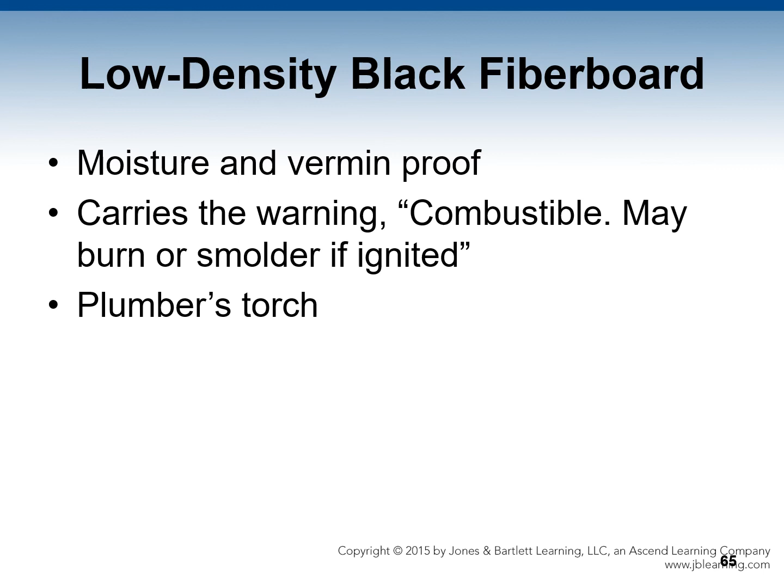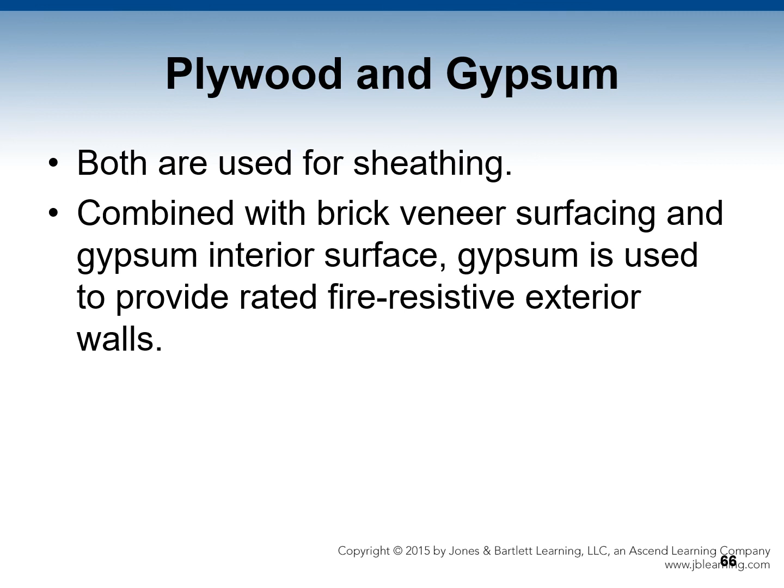Now we'll look at plywood and gypsum. Plywood is also used for sheathing, and it may be used at the corners to provide shear strength. Gypsum is also used for sheathing and combined with brick veneer surfacing and gypsum interior surface, and is used to provide rated fire-resistive exterior walls.

Now we'll look at foamed plastic, also used for sheathing. It may or may not be flame inhibited, and in a fire it may degrade and give off noxious fumes.

Now let's look at siding. Novelty siding, like clapboard, is combustible siding laid over the sheathing of a building. Batten is a type of siding that uses vertical strips of wood to cover joints. Plywood siding comes in 4-foot wide sheets that give the appearance of 4-inch wide strips about a half inch apart. Shingle and shake is a type of siding, and these thick wooden shingles are formed by splitting a short log into tapered sections. Asbestos cement shingle is a fireproof roofing shingle that is composed of cement reinforced asbestos fibers.

Asphalt felt siding, also called gasoline siding, is manufactured by saturating a dry felt with asphalt, then coating it with fine glass fiber. It has no fire resistance value.

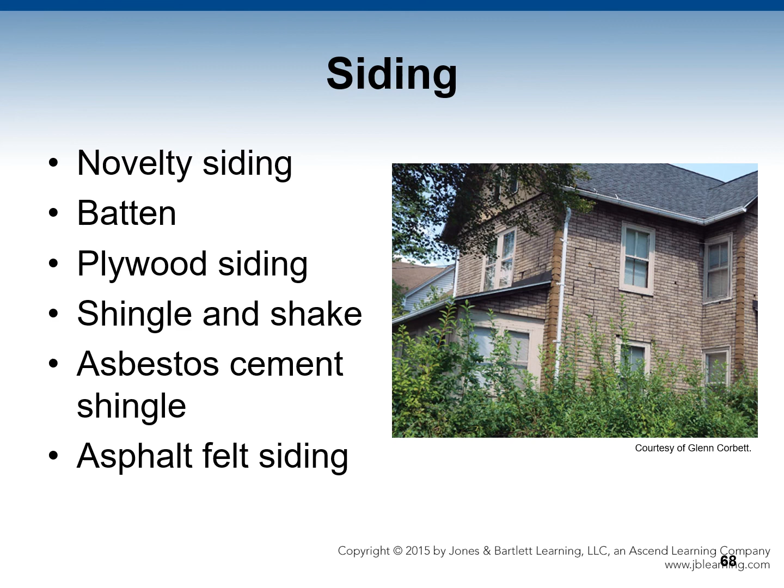Metal siding is made to look like another type of siding. Corrugated metal siding is made of grooved panels and is utilized on industrial buildings or of wood or steel frame. Stucco is made of Portland cement and is an exterior finish.

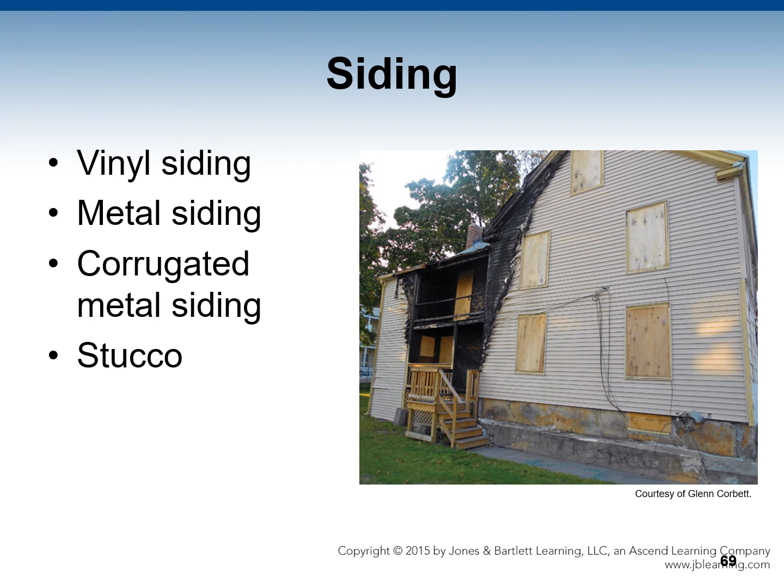Now we'll look at brick veneer. It's economically attractive. Brick veneer walls are laid up from the foundation in one wythe. Such a wall is unstable because it's thin. In a veneered wall, galvanized steel anchors are nailed to the studs. If there's a fire in the wall, the nails may detach from the studs due to pyrolytic decomposition.

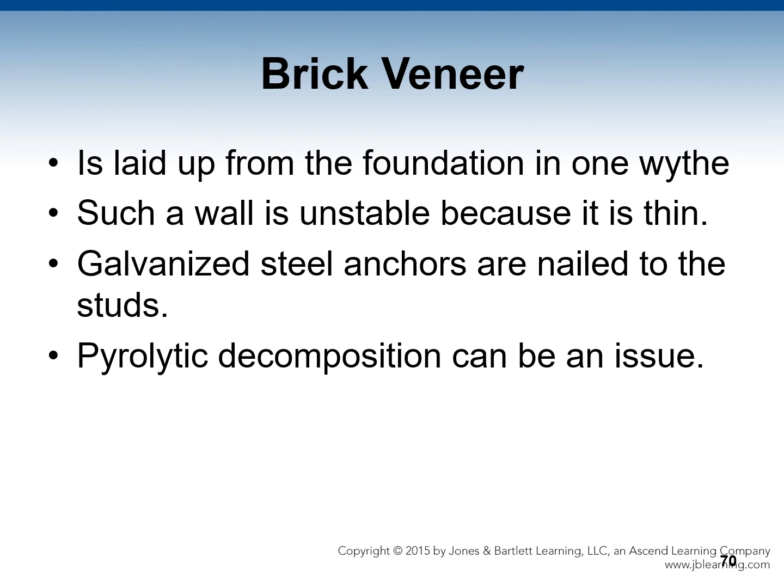If a brick wall is all stretchers, suspect brick veneer. Buildings may combine brick veneer and solid brick masonry, so that's something to be aware of. You need to know when you approach a burning house if there's a brick veneer finish or a solid brick wall, because some constructions have both, so you know which to watch out for.

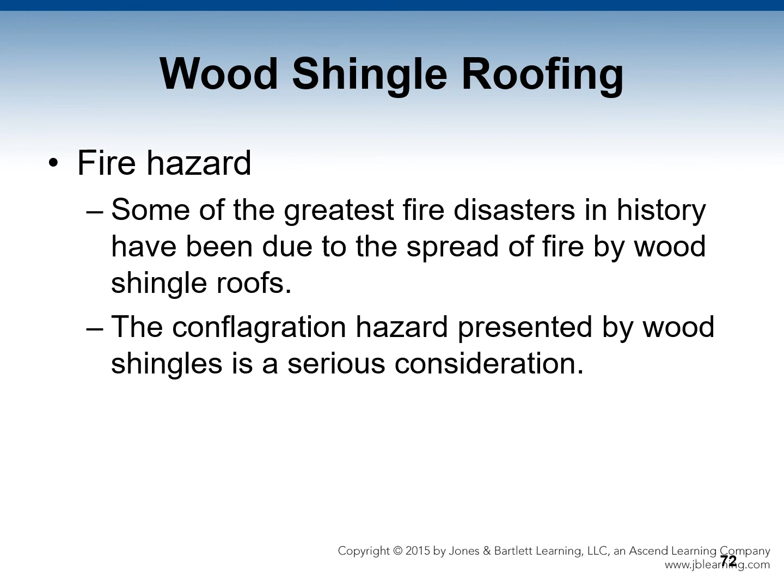Now let's look at wood shingle roofing. Some of the greatest fires in history have been due to the spread of fire by wood shingle roofs. The conflagration hazard presented by wood shingles is a very serious consideration. Out west, even though new construction forbids it, older homes have a lot of wood shake or wood shingle construction, so just be aware of that.

Unfortunately, wood shingling is making a strong comeback. Many areas have wood shingled roofs, but they are permitted wherever frame buildings are permitted. Fires in Houston, Texas, and Davis, California are devastating examples of this type of roofing. Technically you can still build with it in California, but good luck trying to find homeowners insurance, because most insurance companies will not underwrite the policy if it has this type of roofing, just because of the astronomical hazard it presents. It can be prevented if it's treated regularly, but the bottom line is people don't do it, so insurance underwriters will not write a policy for it.

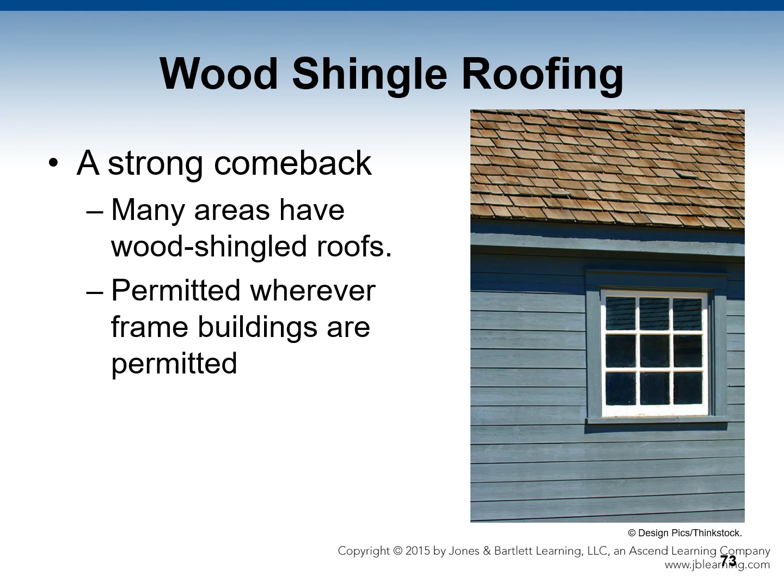Now, there are various testing laboratories in existence. One rates wood shingles in accordance with NFPA 256, which is the standard methods of fire tests of roof coverings. The elements considered include flame exposure, spread of flame, and resistance to burning brands or flying pieces of burning wood. Roofing materials are classified as A, B, or C. For clarification on that, make sure you read your text so you have a total understanding.

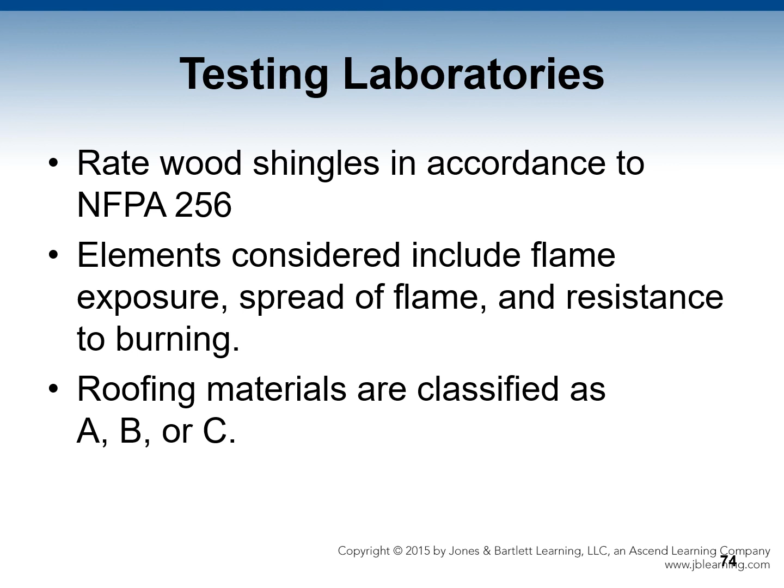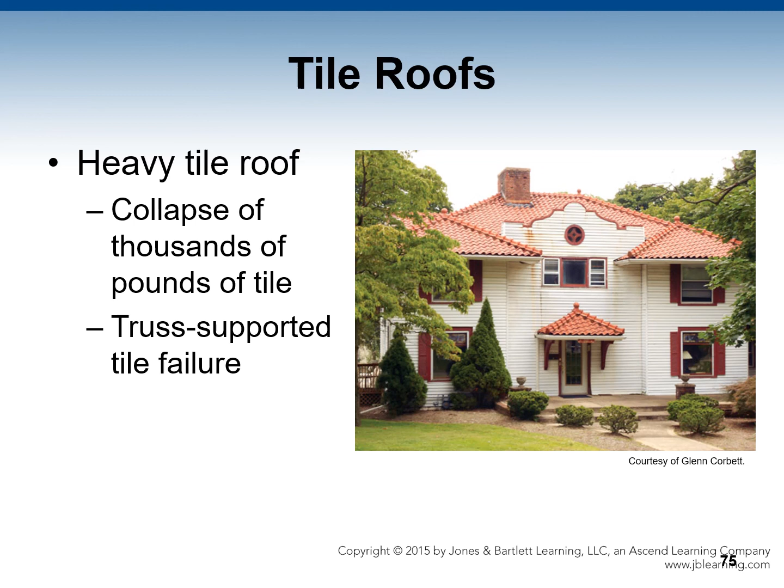Now we'll look at tile roofs. Tile roofs are heavy, but they're good, and still popular today. But if they collapse, you're looking at thousands of pounds of tile coming down. So you should always use a fog attack on an attic fire with a tile roof. The tile roof is truss supported, and if the trusses fail, the tile is going to come with it, so that's a lot of weight coming down. However, they are fire retardant and very durable, so they have their benefits, but they do have their downfalls as well.

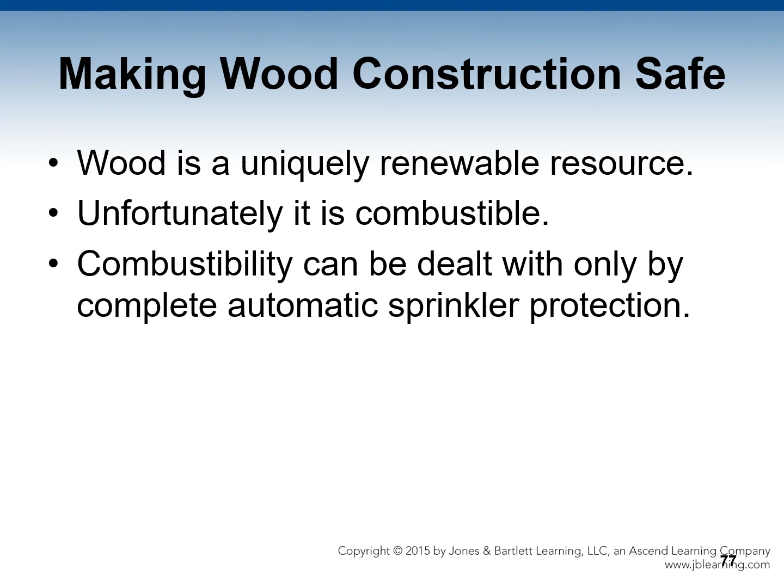So, making wood construction safe. Wood is a uniquely renewable resource. Unfortunately, it is combustible. Combustibility can be dealt with only by complete automatic sprinkler protection, properly designed, with adequate water supplies.

So let's review what we covered in this chapter. Type 5 construction includes 6 types of wood frame structures: log cabins, post and frame, balloon frame, platform frame, plank and beam, and truss frame. In a balloon frame building, fire can spread through all the interconnected spaces from cellar to attic and across the ceiling. The current practice of designing wood buildings of lighter and lighter materials and substituting geometry for mass has brought about significant strides in the architectural field, but has also created significant problems in firefighting. Trusses are one example of such a development.

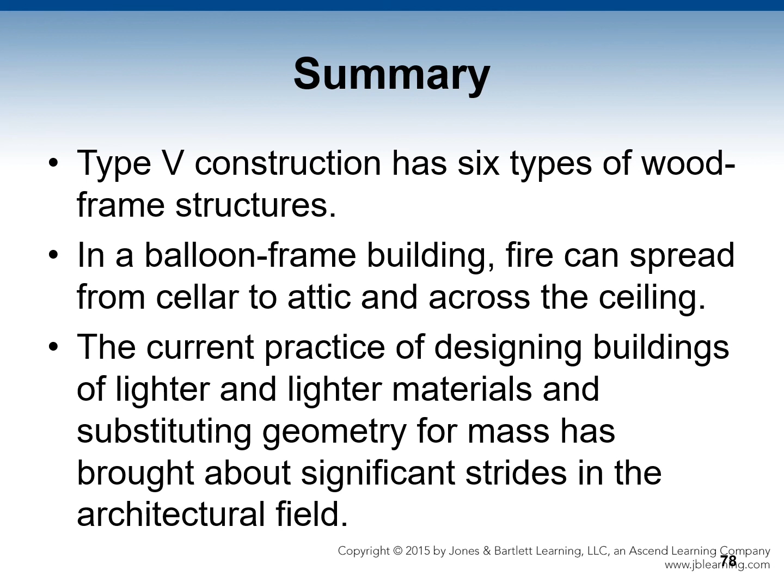One of the major problems we discussed with combustible construction is fire spread through hidden voids. We also talked about fire stopping and how it's often required by code to be installed to prevent spread of fire, but there are no tested standards for wood fire stopping or draft stopping.

Wood cannot be made either fireproof or non-combustible. Unfortunately, that's expensive and not commonly used. And finally, wood is a uniquely renewable resource, but it is always combustible. The problems of its combustibility can be dealt with only by complete automatic sprinkler protection, properly designed with adequate water supplies, and being completely or competently maintained. Structures with unsprinklered floor or attic voids do not have complete sprinkler protection.